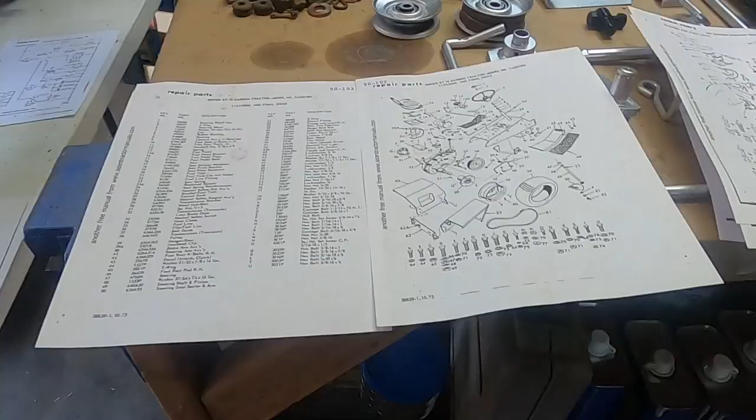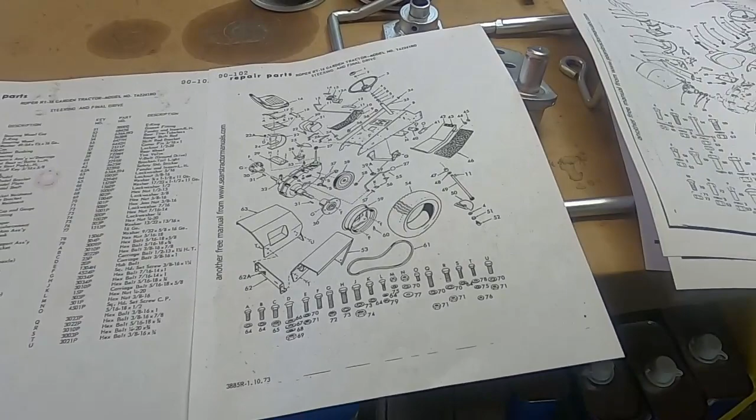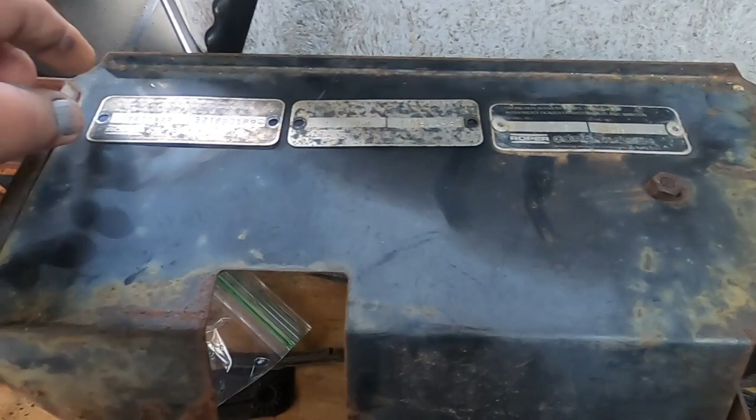So the manual I downloaded for this 16T wasn't quite jiving with the parts. I got to looking again, and this is for an RT16, because it's showing square fenders and pads for the footrests. So my 20T is a better match. I went back and looked at the model numbers, and I've got a T6328BR, and this is a BR, and this is a... CR. So I found it, and I just printed the whole manual. So yeah, I got the right manual this time.

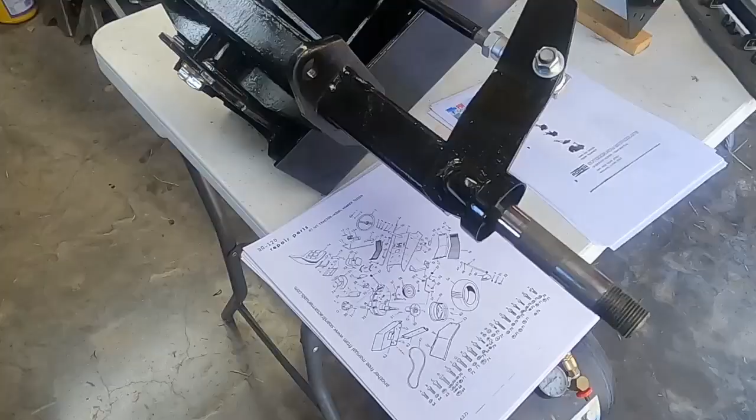So now that I got the right manual, the incorrect manual isn't helping me any.

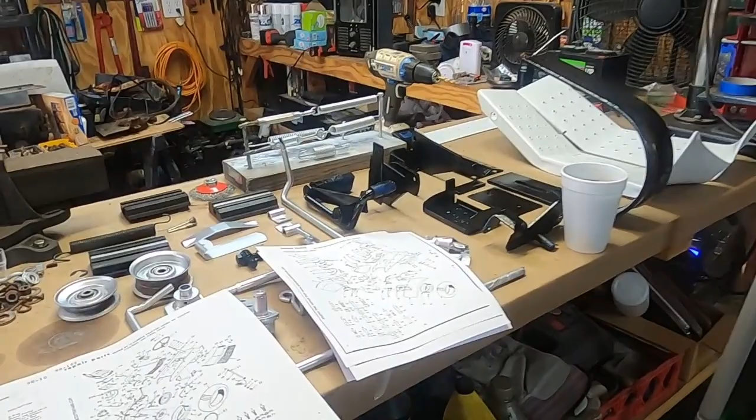All right, I'm gonna finish my coffee here, and we're gonna hopefully go out and get some nuts and bolts. That's what I was doing, going through here to see what nuts and bolts I need to go source, so I can start putting things on.

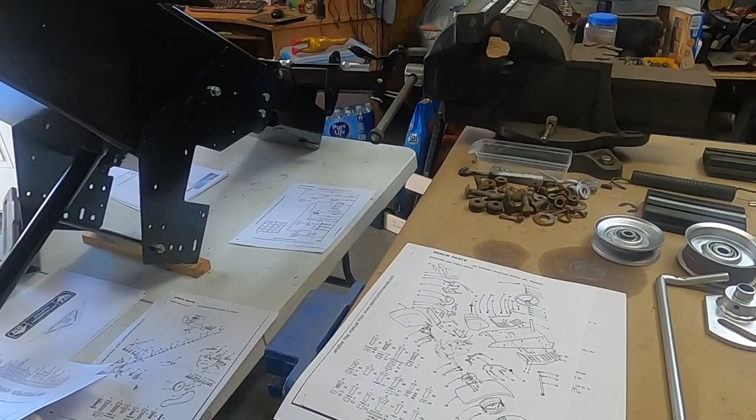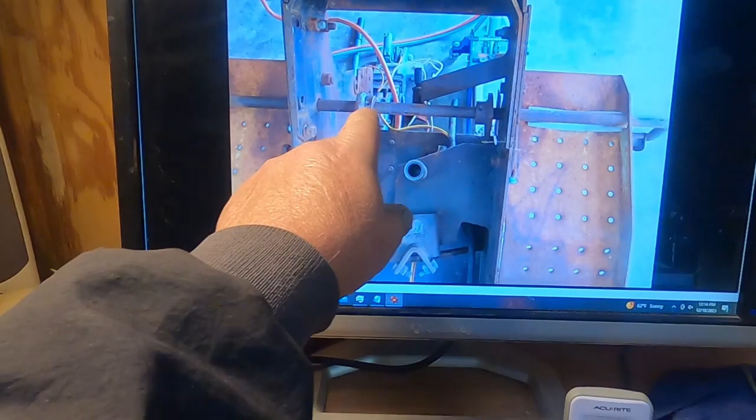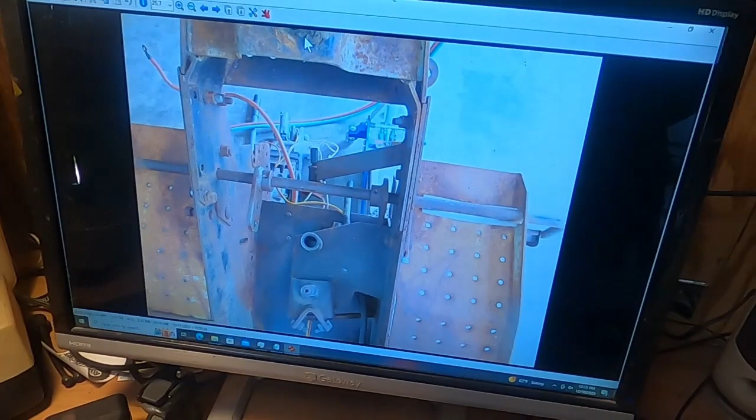I think the first thing that has to go on is the footrests. Okay, so here's the clutch bar and the two roll pin attachments. I wanted to make sure before I hammer roll pins into this thing that I've got everything positioned correctly. The picture's backwards, I realize that, but this one's up and that one's down. And if you see, I need to look at some more stuff here before.

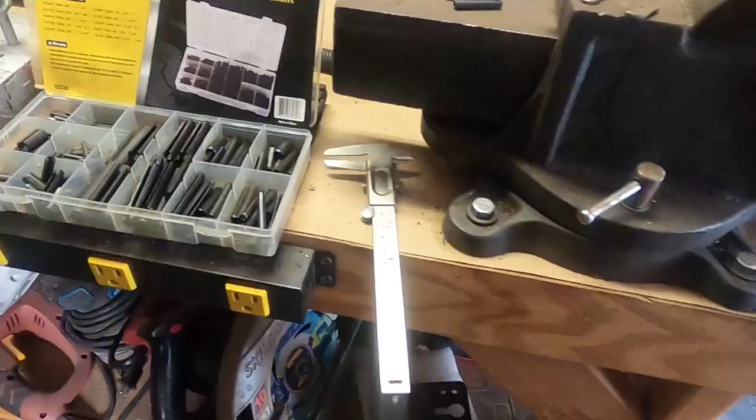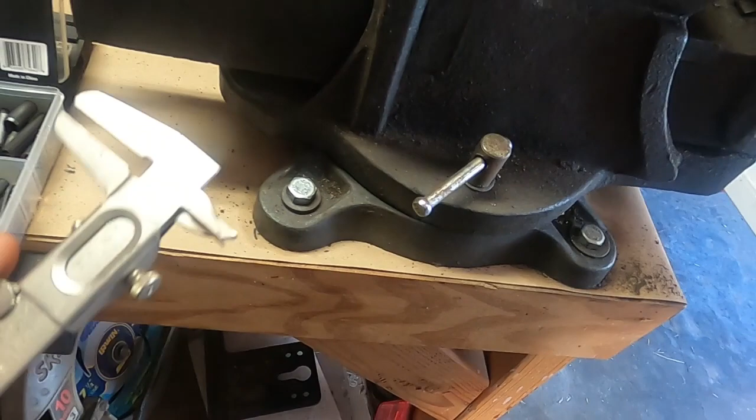Anyhow, so at list part 55, I was trying to see what size that roll pin was. So if we go look at part 55, it just lists roll pin, no size. So I got out my roll pin assortment, and the closest I can come to, this is the original, and you see it's collapsed. So the new roll pin should squeeze in there. There's a pretty good gap in it, but the thing is, it's just a tad bit shorter. So if we measure that, and then we come over and measure that, you see it's about an 1/8 inch shorter, but that should be fine.

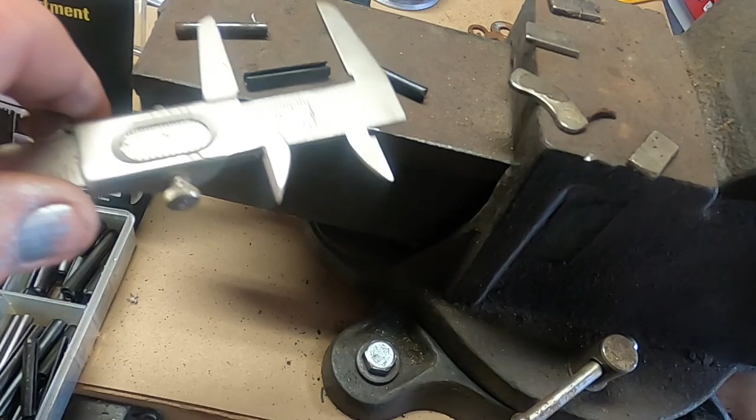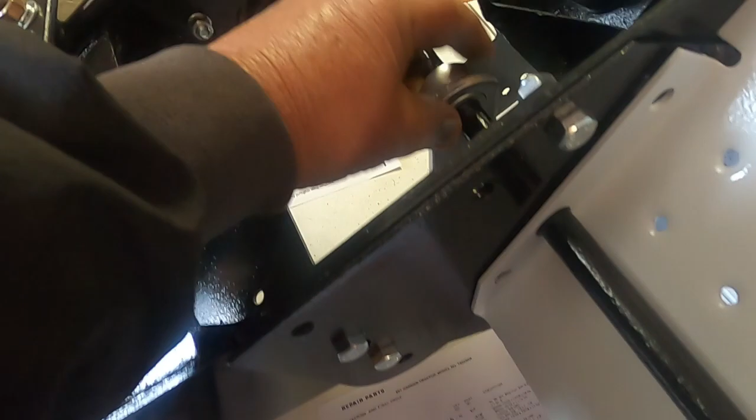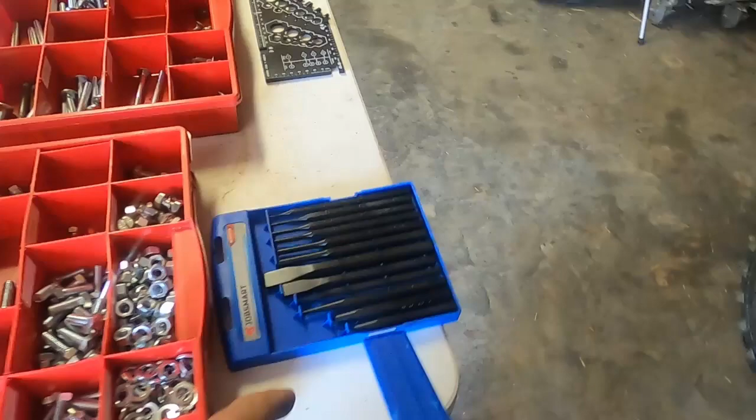Yep, I dropped it. So I've got this punch here that will actually go all the way through, but I wasn't sure, so I went and bought a new punch set. We're going to try a couple of these just to see.

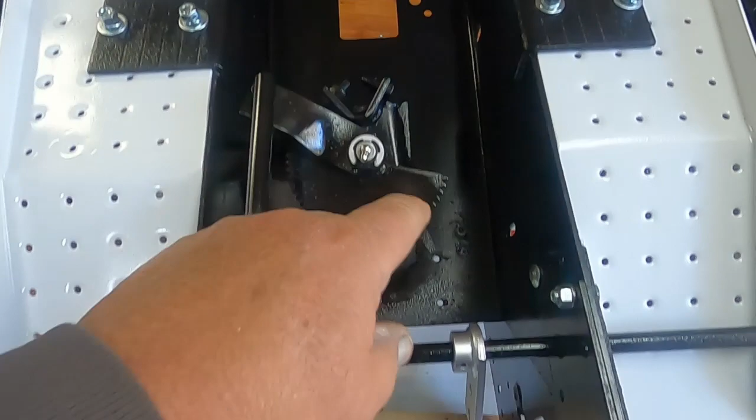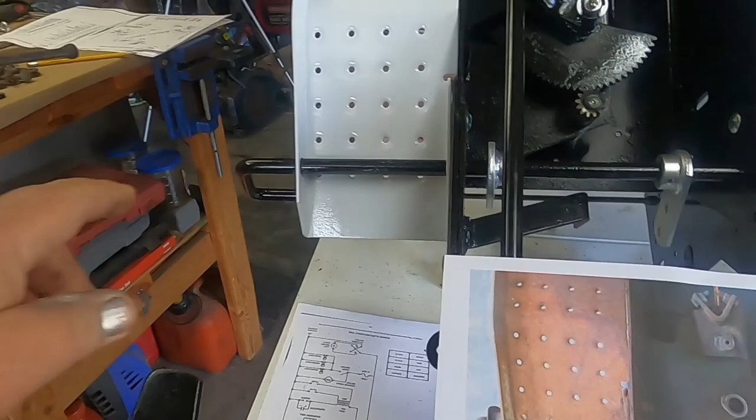All right, so looking at the picture on the computer wasn't really helping because it was upside down and backwards, so I printed it out. So here's the steering shaft. We come down, so here's the bar, and you see the pedal is located right about there. Okay, so now this part has to go up like this, and there's the hole. I can see through it, so that's how that goes.

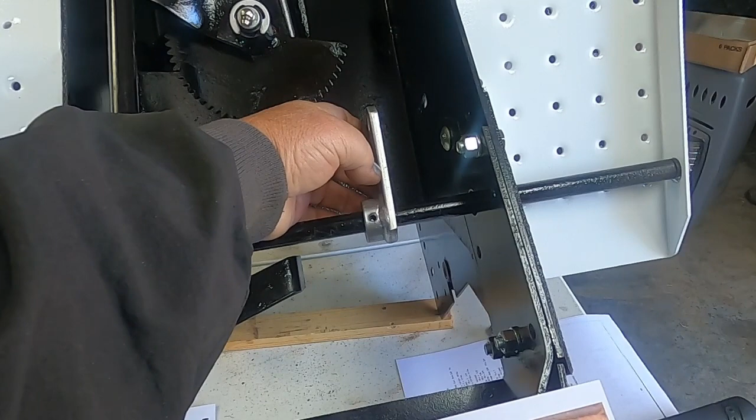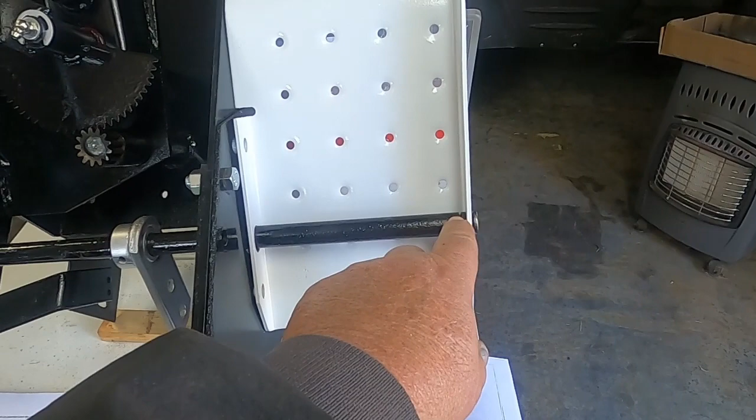Technically, I think I can go ahead and put the roll pin in now for this, but I got a couple washers I have to put on here and a couple E-rings I got to go find.

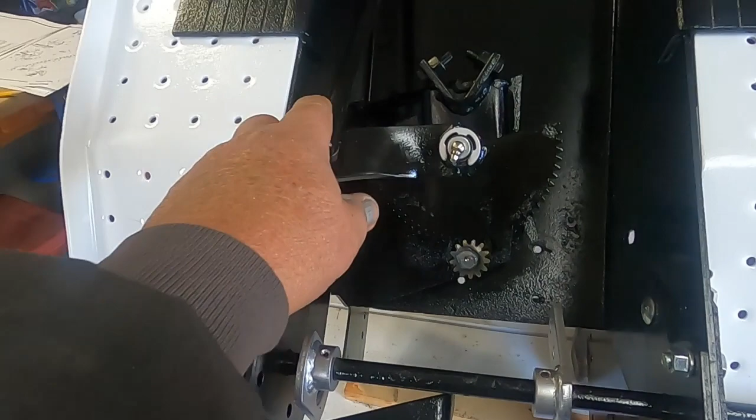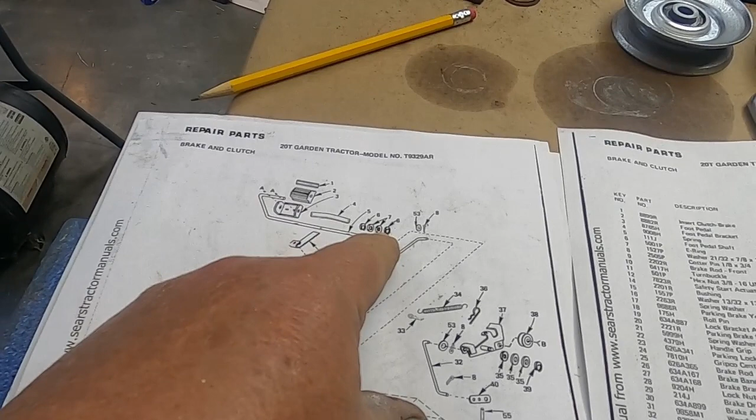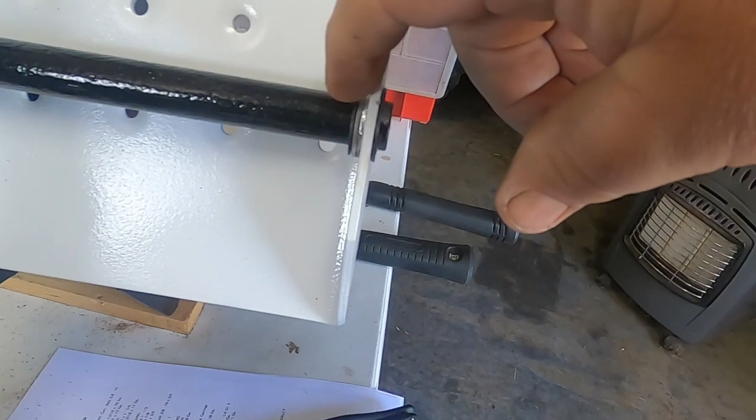Well, after driving the first roll pin home, I had to move the steering bar so I could get to this one, but then I got to thinking, is there anything that's supposed to be over here? I went back to the diagram. We have the foot pedal, which I'm going to get to here in a little bit. And then we got this spring that actually goes under that. So all the other fastening stuff's on the end. We got an E-clip, 2 washers, and then another E-clip. So E-clip, 2 washers, and an E-clip.

I guess what I want to try to do now is put that spring under here. Maybe I should have done that first. I don't know, let's see what happens. Well, that wasn't too bad, I was able just to push that in by hand.

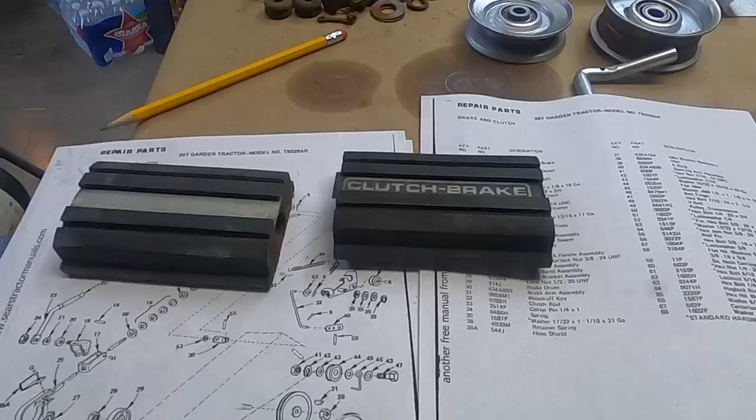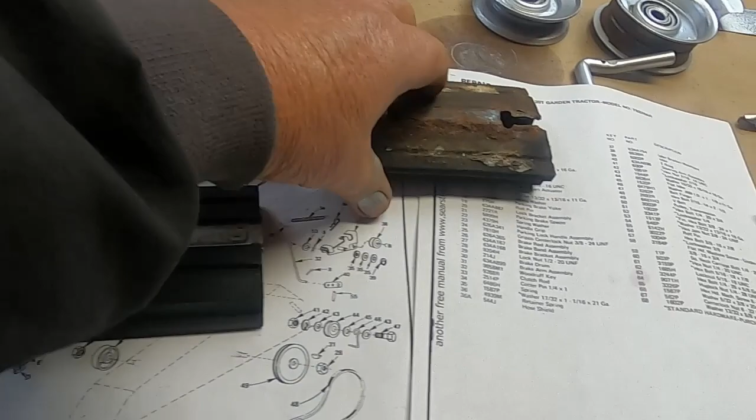All right, so now I'm going to hammer this one home. This was the one I was going to use, but after looking at the back, it's cracked all the way down. So I went out and got the other 2. This one looks pretty solid, so both of these are pretty solid. So I think what I'm going to do... which one did I clean? I cleaned up this one. So we are going to relocate that to here.

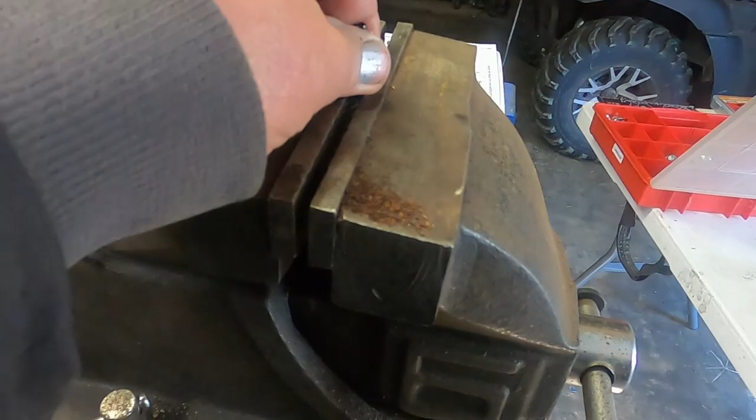Yeah, squeezing one end of the roll pin down in the vise helps you get it started. So we're done with roll pins, hopefully for now. Yeah, I got the pedal installed.

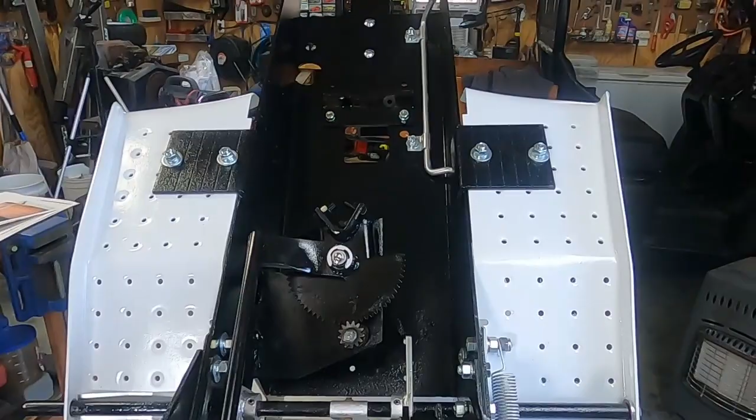All right, I think it's about time to call my son out here. I'm going to have to move the mule, and we're going to take this thing off and probably put it on jack stands for right now. But yeah, I got footrests on, I got the roll pins installed. I didn't find a new screw, and I went ahead and just threw that in there because I'm going to buy me a little multi-kit of screws and we'll replace that later. Got the clutch attachment on. So pretty much everything I need to put on underneath here is done.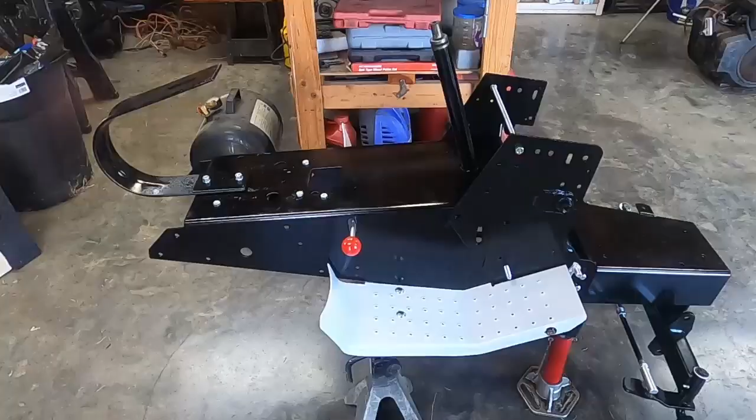So hopefully I can turn this into a rolling chassis maybe tomorrow. But yeah, all new hardware, everything's tightened down. So yeah, let me make some room here and we'll get this thing right side up. Boy, that old girl got heavy quick. Yeah, my son helped me, but I still had to use the crane.

So I guess it's getting late. I gotta clean up that mess over there. I'm gonna have to get some more hardware, don't know exactly what yet, but mainly to install the little switches and everything.

And I guess tomorrow, since I've got the stuff ready to make it a rolling frame, I got the transaxle and all the hardware ready to go. And the tubes are holding air good, and them tires are ready to go, and all the hardware to put them on is ready to go. So yeah, I should be able to make it a rolling frame tomorrow.